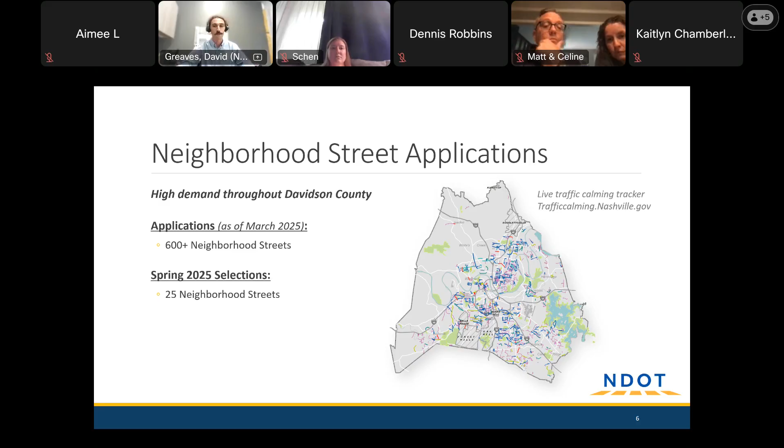So we're going to talk about the tools in a few minutes, but it's important to note that while this program does have kind of a limited palette of options in terms of what we have to design with, there are all sorts of things that Metro Nashville does outside of the traffic calming program. And for anything that may come up that sort of falls outside of the scope of our project, we want to make sure everyone's aware of Hub Nashville.

So this is a great resource to make basically any request of Nashville's government. It can be transportation related, it can be debris in the roadway, or things like safety. Really, the only thing they don't want to hear about is emergencies, where 911 is the proper resource to reach out to. But pretty much everything else can be accessed by calling 311, going to hub.Nashville.gov, or using the mobile app.

So talking about how Winthorne was chosen, basically when a street applies, that kicks off the process, and we then do a data collection study. So we look for vehicle speeds, how fast people are going, volume, how many cars are driving on that street per day. Those two make up the biggest chunk of that scoring formula, because essentially those two combined kind of produce the danger that we're seeking to mitigate.

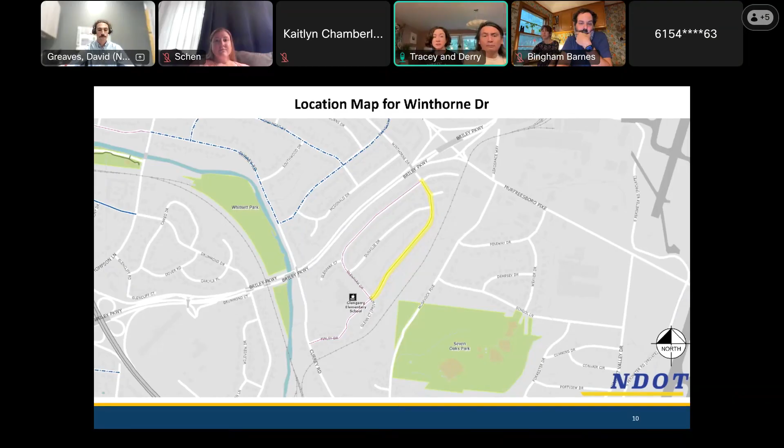Because I know there are speed bumps that go from one end to the other that are smooth all the way across, made of asphalt, and they only affect cars that are speeding. So if you're actually doing the speed limit of 25 miles per hour, you don't get lifted that much, but when you hit it going 45 miles an hour, your car reacts. What is the purpose of the design that they've decided on?

That is great feedback, really appreciate you sharing. I have a slide that goes into the weeds of what speed cushions and tables are. Is it okay if I answer all of that once we're covering that? It's a good question, and I just don't want to spend too much time repeating.

Since I did apply for it, I am 100% certain I want these. We have children on the street to protect, and we've had a lot of scary close calls just getting the mail. However, I also hate them. I also hate driving my car over them. I hate them too, guys. I'm just more concerned about my 13-year-old daughter. So that's 100% why I'm into the idea of getting them.

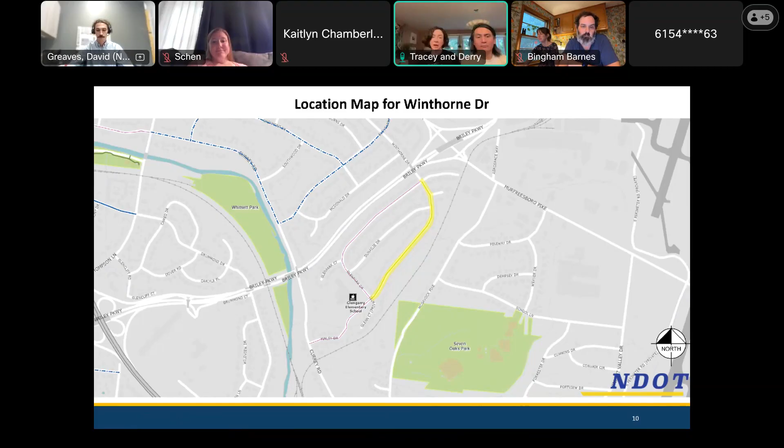But you're right, I don't want to drive my car over them either. I wish there was a better design. I'm so looking forward to hearing what you had to say about that later.

I would echo exactly what Tracey's saying. I have 2 young kids and see these cars come flying down the road, and it terrifies me. Again, like everybody here, hate the speed humps on Curry. My husband and I have complained about them since they've gone in, but oh my gosh, I wish we had them on our street. I know that they serve a purpose. So yes, we don't like the speed humps on Curry, but we understand it serves a purpose. I did used to find myself going 40 miles down Curry, and I don't do that anymore. So they're annoying, but they serve such an important purpose. I would really be pro speed humps.

Are any of you guys familiar with the speed humps on Old Glen Rose Road? I'm familiar with it, and I'm wondering when we get to that slide - I go slow there anyway, so I am curious how well those big speed humps work compared to the long speed humps on Old Glen Rose versus the ones on Curry.

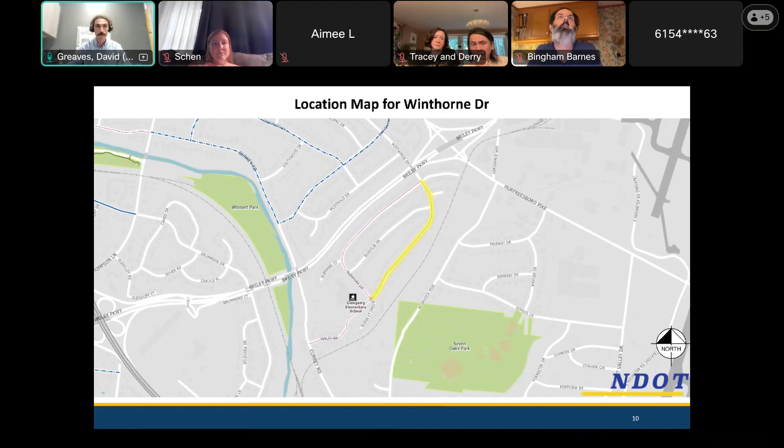We've got some questions to circle back to, so I'm going to charge ahead into our toolkit. First is the speed cushions - let's just recap what these are.

They're modular rubber devices made in a factory in small sections and then pieced together on site and bolted onto existing asphalt. The reason they have those gaps, like why they're 6 feet wide, is to reduce the impact to emergency response vehicles. The thinking is a larger vehicle, like a fire truck, would be able to hit it right in the middle, and with their wider wheelbases, not be quite as affected, where smaller cars, as y'all have commented, traverse them in a way that's a little more impactful at higher speeds.

They're just about 3 inches tall and come in a variety of lengths. I hope you don't mind, while you were talking I looked up what's going on Old Glenrose and Curry Road, and it looks like the ones you have on Curry are 14 feet long, where the shorter options, 10.5 and 7 feet, feel a little bit different. On a road like Winthorne, we'll typically do the 10.5 foot variety, and the 14 feet are generally more for real collector roads and less so the local streets.

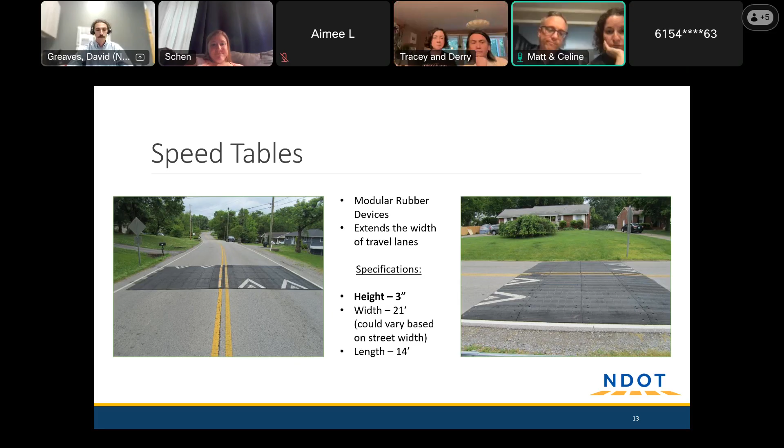A question on the speed humps, the first option, whatever those are called. You showed a couple versions there, some with 2 across and some with 3 across. What would be the prescribed thing for Winthorne? Because I do think the 3 across would actually be better in some ways.

You could completely agree with that. Hit it with both of your tires at once. Right.

Yeah, I have bad news. So 3 cushions across fit on roadways that are 24 feet wide and up, and I don't think that Winthorne gets above 22 feet in any spots. So basically, if we were to cram 3 in there, I think we would not have gaps sufficient for vehicles to traverse them. That's just a design guidance question, but I do realize that's not the answer y'all were hoping for.

And they only come in like a 6-foot width. You couldn't do 2 4-foot ones on either side instead? Yeah, so if they're any narrower than 6 feet, a regular car would be able to just drive on over without being impacted. Oh, I see. And we've actually in neighboring municipalities seen that in action, so we know both from experience and just speculating that that's the case, unfortunately.

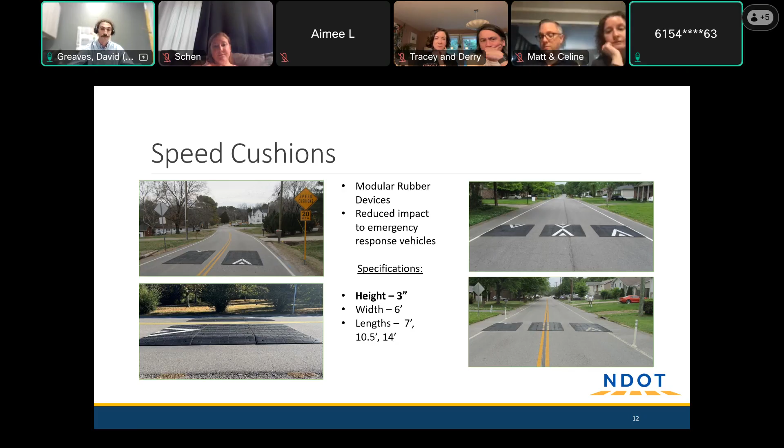Before I move on, we do have a little bit of data about the impact that vertical measures have on projects. In 2023, we did a limited study of 6 projects and found that the average speed came down from 31 miles an hour to 22 miles an hour across all of those projects. And then the 85th percentile speed, that metric I described earlier, came down from 37 to 25.

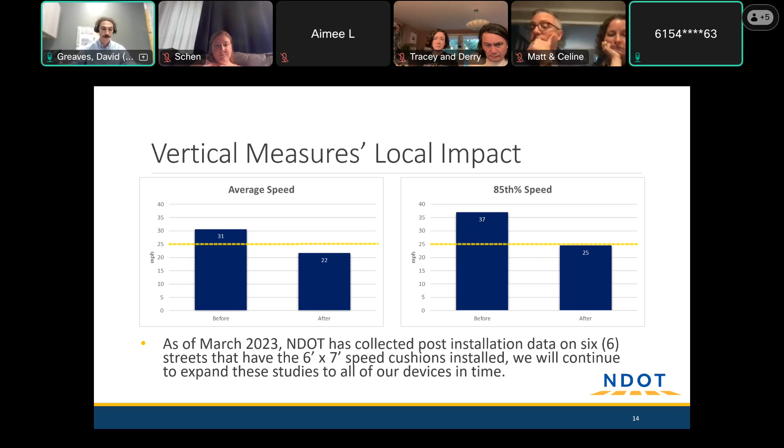So all this is just to say that we don't do these all over the place for fun. It's because we know they work, and the results we've collected back that up.

So not everywhere is an appropriate place for speed cushions. On sharp curves where you might not be able to see it coming, or the crests of hills, or hills that are too steep, are all spots where we might not be able to fit in as many speed cushions as we'd like.

In situations like that, we can apply what are called radar feedback signs. I think there might be 1 or 2 of these on Glen Rose Avenue. I'm trying to think where another nearby one might be. But if anyone hasn't experienced these, they're essentially a solar powered sign that reports your speed back to you, and has the speed limit sign above. So for people who may be speeding by mistake, it can be a helpful reminder to go closer to the speed limit.

These don't physically affect cars, and they don't do any enforcement. So it's not taking a picture and writing people tickets like a speed camera might. It's purely an informational sign. On average, we saw that these tend to have a speed reduction of 6 to 7 miles an hour at the signs where they're taking that data.

The caveat though is the muscle car crowd that we heard about a little bit earlier. We're not confident that this is like a comprehensive speeding solution in all cases.

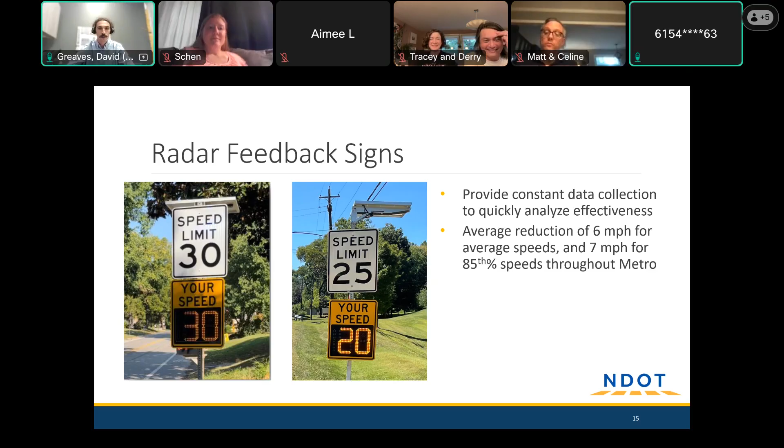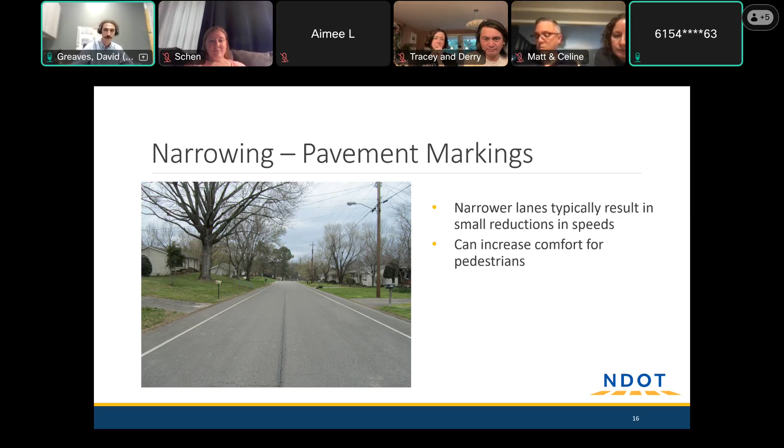On wider roads, we sometimes do pavement narrowing. If there's excess pavement in a road, it can be more comfortable to drive more quickly. We've all experienced this on the highway, for instance, where you have lots of room and no one has a problem driving 60, 70 miles an hour. But when that space gets narrowed to a tighter, more claustrophobic feel, that can induce slower speeds just with a psychological effect. Where there aren't sidewalks, this can sometimes help define a space where one might feel more comfortable walking and not worry as much about being in conflicting space with vehicles. So that's an added benefit sometimes.

Similar to narrowing, but applied at intersections, we'll sometimes do what are called bulb outs. This shrinks a large intersection into a tighter one. Because the turning radii are smaller and the lanes are narrower, that forces vehicles to take turns at a slower speed, giving a driver more time to see if there's another car or a pedestrian crossing the road they're turning onto. It also has the benefit of shortening the crossing distance. The picture to the top left shows that well, where before this was installed, to cross the street you're walking like 50 feet from corner to corner, but after the bulb outs are installed, you're just crossing those 2 lanes, so it came down to like a 20-foot cross. It helps people get across the road quicker and spend less time in space where they might conflict with cars.

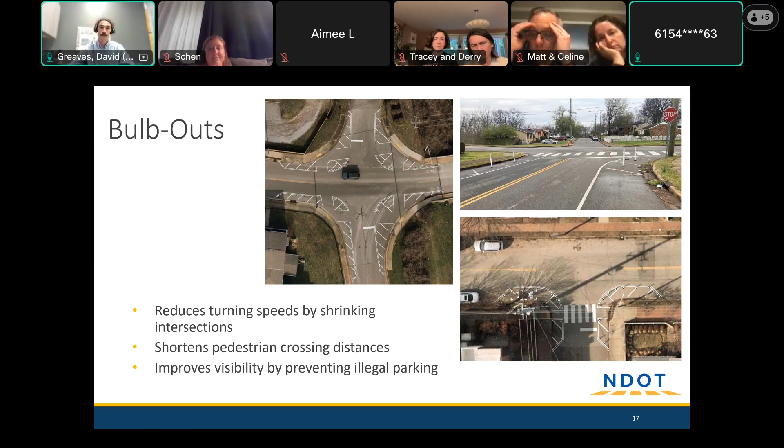On really wide roads, we'll sometimes do chicanes, similar to a 3-cushion layout. Winthorne isn't quite wide enough to make these work, but they force slower speeds by inducing side-to-side maneuvering, turning a straight run into a serpentine sort of corridor. One downside is that this can reduce the number of on-street parking spaces on streets where that's an important feature.

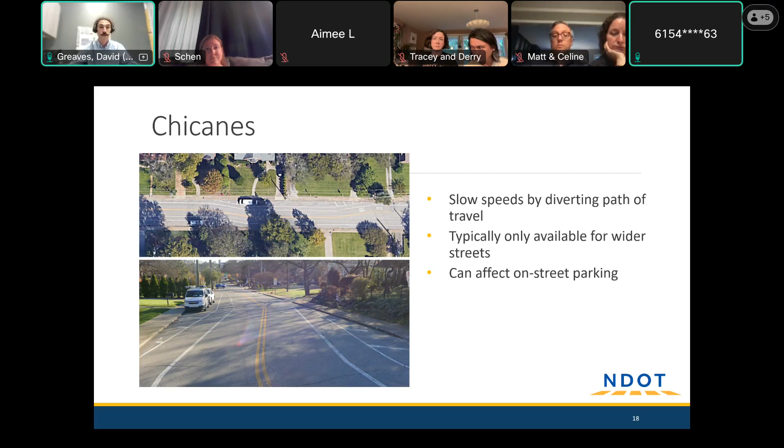And then lastly, at large intersections, we can do traffic circles. This basically turns a 4-way stop into a mini roundabout, where to make a left turn, you'd go all the way around the circle before getting onto that street. It's a good way to make sure intersection turning movements are happening more slowly and deliberately than before they're installed.

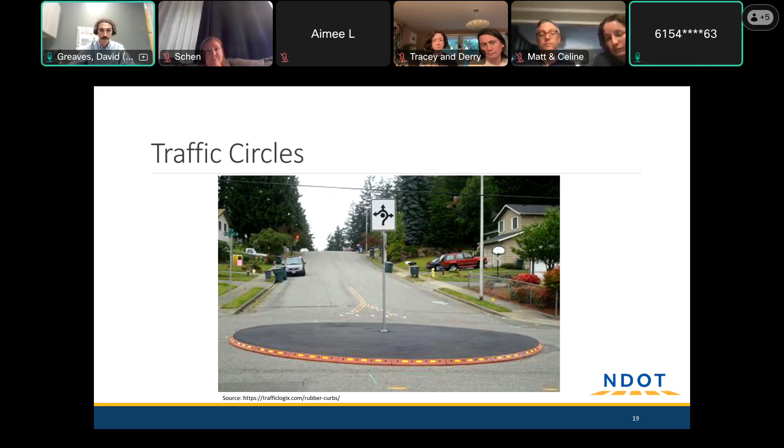So that is all the tools. I'm going to now flip to our concept. Again, we're showing this to get feedback from you all. This is not the final design or the only plan that we can explore, but I'll walk you through what we've thought about so far and then take questions and comments.

When we do vertical measures like speed cushions, we try to place them somewhere between 300 and 500 feet apart, spaced as evenly as we can. The reasoning is we don't want gaps long enough for people to speed back up and make up for lost time. We've found that when we put these too far apart, that tends to happen. Too close together is both diminishing returns and potentially excessive, particularly in areas where this is a place you all have to drive every day. So this run of 6 cushions is closer to the 300-foot end of the spacing spectrum, so there may be room to reduce the number we're seeing here. That's what we've put together so far.

I've heard some feedback from you all already, but I'll pause and ask what do you all think? Love to hear any thoughts or questions. Thoughts? That's too many. Okay, understood, that is 6. We could do 3 or 4. Yeah, I think it's a numerous amount that is in this plan.

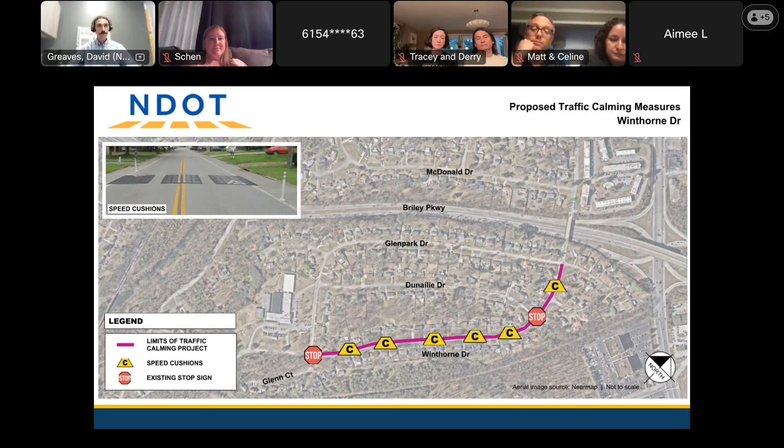All right. Well, so moving on, this is a flow chart of a general traffic calming project in the program. So as I mentioned earlier, this started with an application. We then did that prioritization and selection process where we collected data and sort of ran it through our scoring formula. And we're here now at the first neighborhood meeting. So after tonight, we take all the feedback that we've collected here as well as online in that survey and kind of think about the concept design a little more, sort of draft up an alternative.

And then we'll do our site visit. So go out to Winthorne Drive and take a bunch of measurements, make sure that the road is as wide as we think it is. If it is wide enough to fit 3 cushions, we will do that. It's to make sure that people aren't doing that sort of drive off to the side to get around maneuver that we sometimes see. And then ultimately we'll draft up some construction plans.

So once that design step has been done, we can kind of choose one of these 2 paths. We can schedule a second neighborhood meeting to take a look at what we've come up with, or we can post those plans online and basically send everyone a notice that they're up there for review and that we want you to vote, yes or no. Would you like the project that you're looking at to proceed, or would you prefer we do something else?

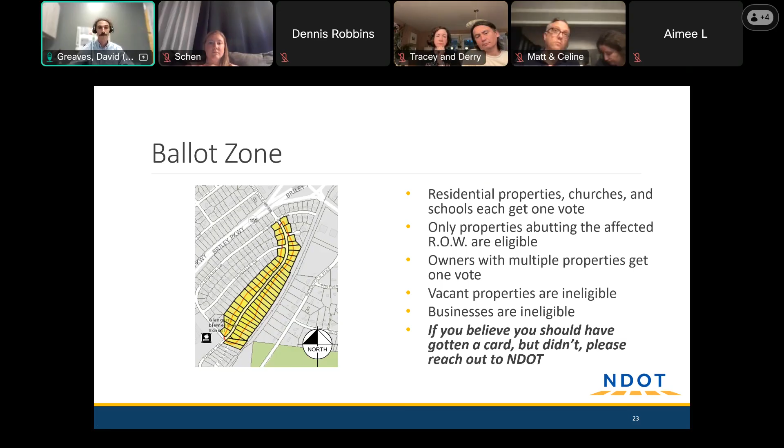Any other questions about those balloting specifics? If not, I'll underscore that if you think you should have gotten a ballot, don't hesitate to reach out. We can look up your code pretty easily. So no need to worry if it got lost. We'll make sure that you can get your information. Anything else? That's about all I've got on content here.

This has been really great. Thank you. Sorry, I was just going to say, how soon will we get the revision of the placement of the humps? That's a good question. We shoot for between 1 and 2 months. Basically, we need to do our site visit, considering the feedback we've collected tonight, take our measurements, and then drafting those construction plans takes a little while. So in the neighborhood of 1 to 2 months is what we're looking at.